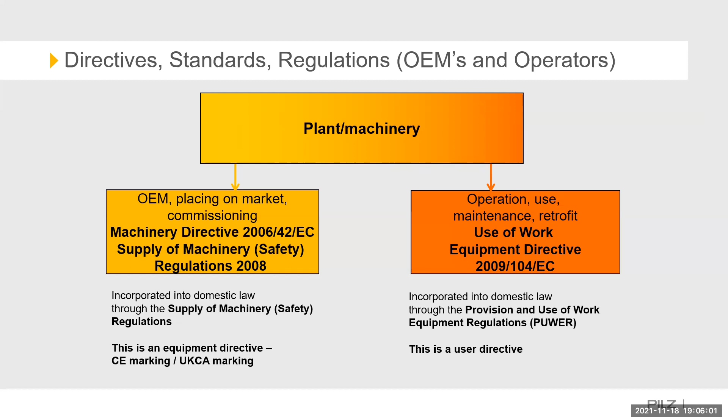So just to give an idea of standards, an overview of standards, it is a legal requirement to follow the supply machinery safety regulations. It isn't a legal requirement to follow a standard. However, if you follow the standard and the process of that standard, it's easier to show conformance to supply machinery safety regulations, as opposed to making up your own policies and procedures, really.

So standards are broken into three. We have A, B, and C standards. A, of which there's only really one, which is ISO 12100, which is risk reduction and design principles.

We have B standards, of which there's two types. There's B1, which are general safety aspects, and that could be 13857 for safety distances, 13849 for safety control systems. And then you have B2 standards, which are specific to protective devices. So in that case, that could be 14119 for interlocks or 13850 for emergency stops.

And then finally, we have C-type standards, which are special safety features for individual machine groups. So for instance, you've got 415 for packaging machines, 201 for injection molding machines. So if you were a manufacturer of packaging machines, you'd have a look at 415 part 1. Have a look at what type of packaging machine you manufacture, and then that would tell you which part of the standard you would need to follow.

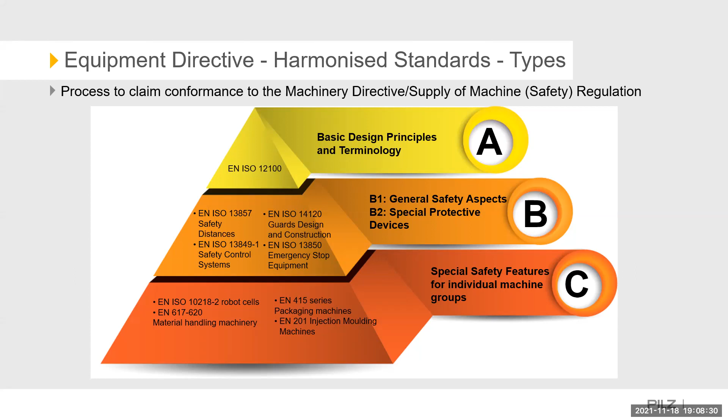The thing to bear in mind is that A and C standards are very rarely updated. Typically, B standards are updated on a more frequent basis due to technology changing, etc. And so what you have to be mindful of is that though there could be a C standard for your particular machine as a manufacturer, it could very well be out of date. And so therefore you'd need to go back and check the relevant A and B standards as well.

So, use of work equipment directive: the employer should take the necessary measures to ensure that work equipment made available to workers is suitable for the work without impairment to their safety or health.

It was adopted into UK law as the Provision and Use of Work Equipment Regulations, or PUWER 98. Pre-Brexit, Brussels would create the directives, and then it would be up to each individual member state to transpose that into their own national law. So for the UK, we took UWED and turned that into PUWER.

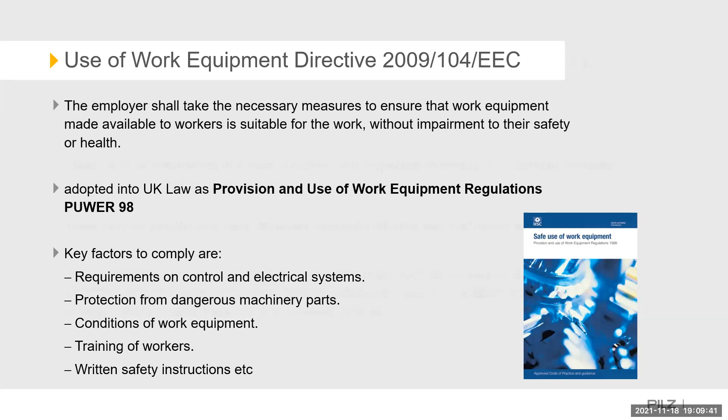PUWER requires that all equipment and machinery is safe.

If you were to have an incident, typically what would happen is HSE would come in to inspect, then they would typically ask for your PUWER documentation, your inspections. If you don't have them, then you would have been basically breaking the law because you haven't carried out a PUWER inspection. But also if you have that inspection, they'd most likely prosecute you under it because PUWER requires that the equipment is safe. The fact that you've had an incident or an accident, they would prosecute you because they'd say that you had a failing against it.

Under PUWER, you should make sure that the equipment is suitable for the intended use. It's safe for use, maintained in a safe condition, and inspected to ensure it's correctly installed and does not subsequently deteriorate. It's used only by people who have received adequate information, instruction and training, and accompanied by suitable health and safety measures, such as protective devices and controls, which could include emergency stops, adequate means of isolation from sources of energy. You've got clearly visible markings and warning devices.

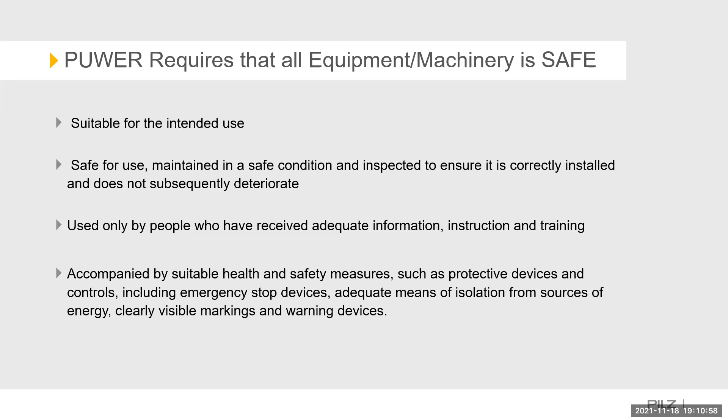PUWER is made up of 37 regulations that are broken down into 6 sections. Section 1 deals with interpretation: what is the work equipment, and what is it used for?

Section 2, which are regulations 4 to 10, covers the management issues with regards to ensuring the suitability of the work equipment for the job it has to do. So you're looking at maintenance, routine maintenance, planned maintenance issues, training of all staff. Have you got a training matrix? And ensuring that staff are aware of the risks to their health and safety when using that piece of work equipment.

Section 3 is a physical examination of the machine, covering regulations 11 to 24. Regulation 11 is dangerous parts of the machine, 12 is protection against specific hazards, 13 is high or very low temperatures, 14 is controls for starting or making a significant change in the operating conditions, 15 is stop controls, and 16 is emergency stop controls.

It's worth bearing in mind that emergency stop controls shall have priority over any control provided for the work equipment under Regulation 15, so the e-stop should take priority.

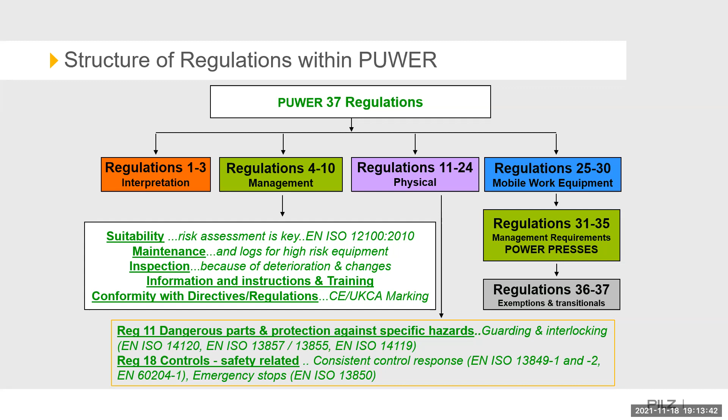But if we look into one or two of the regulations in a bit more detail, Regulation 11, dangerous moving parts: measures must be taken to prevent access to any dangerous part or to stop dangerous movement before any part of a person enters a danger zone.

These measures in hierarchical order consist of the provision of fixed guards, the provision of other guards or protective devices, the provision of jigs, holders, push sticks, or similar protection appliances, and the provision of such information, instructions, training, and supervision as is necessary.

To do this adequately, you would need working knowledge, and this is the competence really, of standards such as 14120 for designing and implementing guarding, 14119 for interlocking, 13857 for distances and sizing of guards, and 13855 for safety distances, stopping times, etc.

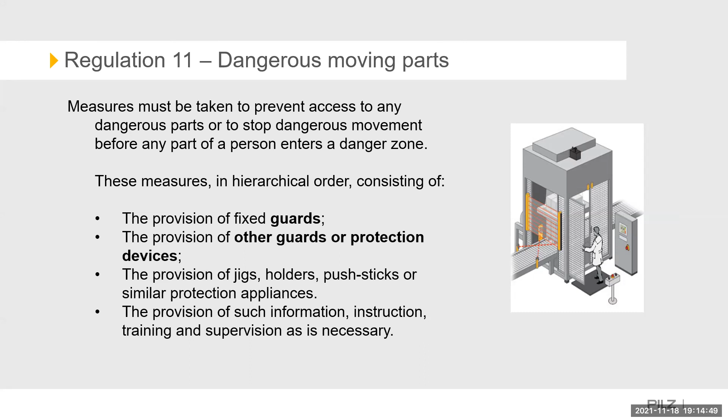And all guards and protection devices shall not give rise to any increased risk to health and safety, must not be easily bypassed or disabled, and must be situated at sufficient distance from the danger zone, taking into account reach over, reach through, and stopping or run-down times.

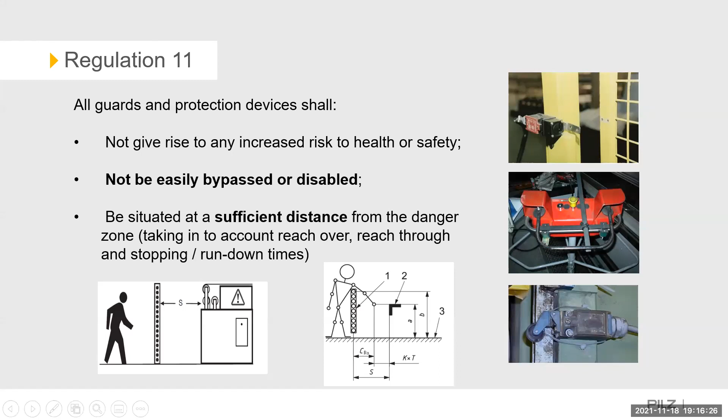So what are the current dilemmas at end user sites? We typically see things ranging from insufficient guarding - there may not be any guarding, too large a gap, it might be damaged, the wrong size, distance, the fixings that are used, or incorrect positions of light curtains and scanners.

So on the previous slide, it may be that the light curtain is too far away from the actual hazard. And so if you were to break the light curtain beam, the hazard doesn't actually stop before your hand or body still gets to that hazard. The stop performance calculations haven't been calculated correctly, or the machine may have been changed over the years and the light curtain hasn't been tested.

Possible fault masking issues in guard safety switch circuits - we'll run through that a bit later on. Open access into dangerous parts of the machinery. You might have uncontrolled access into the moving part of the machine, so there's actually no speed monitoring or monitoring of the machine rotating. You may have no safety when it comes to the pneumatic or hydraulic controls - they're not safety rated. You may have old or non-existent PUWER assessments.

As discussed earlier, it is a legal requirement. Or new machinery arriving on site doesn't meet the current regulations. Or again, that may be that if you've got a sister site, be that in the UK or overseas, that when their machine comes to your site, though they've been using it, it might not meet the regulations.

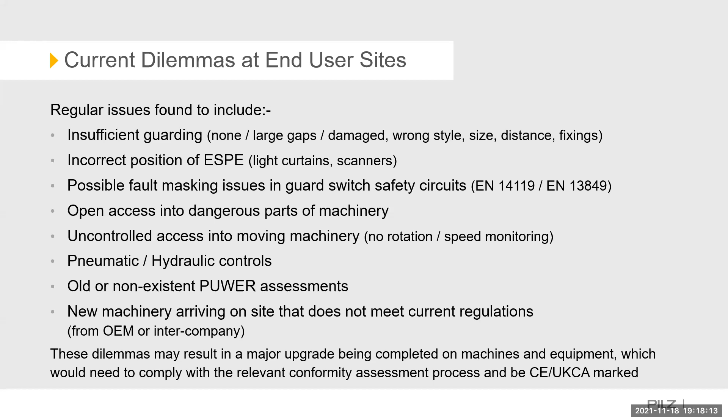So the law - why must we risk assess? And I'm conscious of the audience that I'm presenting to. So the Health and Safety at Work Act under Section 2 requires employers to provide safe equipment to employees, and Section 3, a safe environment for anyone else who could be affected.

And the Management of Health and Safety at Work Regulations 1999 - this is where the legal requirement to carry out a suitable and sufficient risk assessment to justify that the equipment is safe. And even if you purchase a CE or UKCA marked machine, you must conduct your own PUWER assessment and your own risk assessment. The reason for that is the machine manufacturer can't always anticipate where that machine is being installed, how it's being used, and by whom.

An example of that may be that I supply you a machine with a hatch for you to carry out routine maintenance, perhaps to fill oil, for instance. But you've purchased that machine from me and you've mounted it in such a way that I can no longer get to that hatch because there's a piece of steel framework there, for instance. So the manufacturer can't be held accountable for that because it's the way that you've positioned it as an end user, and that would be picked up under PUWER.

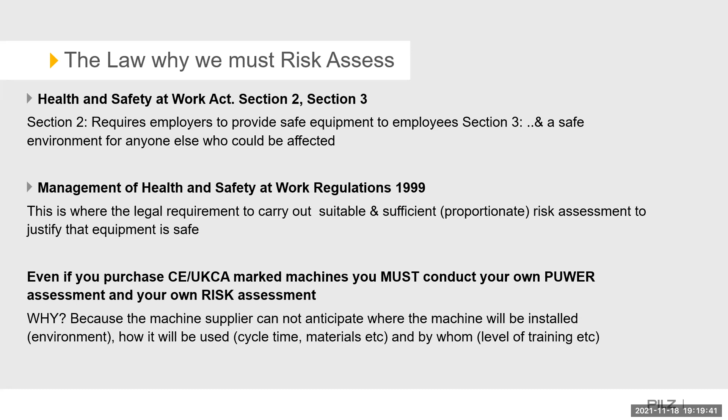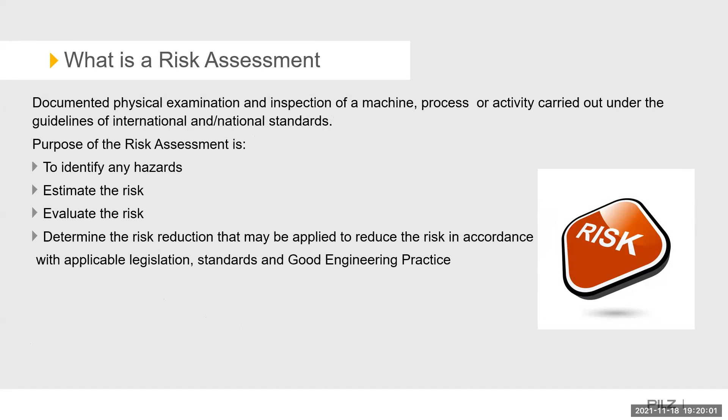So what is a risk assessment? It's a documented physical examination and inspection of a machine, process or activity carried out under the guidelines of international and national standards. The purpose of the risk assessment is to identify any hazards, estimate the risk, evaluate the risk, and then determine the risk reduction that may be applied to reduce the risk in accordance with applicable legislation, standards, and good engineering practice.

So the risk assessment must be dynamic. We must use a continuous process of identifying the hazards, assessing the risks, and taking action to eliminate or reduce that risk, and monitoring and reviewing.

It must be an iterative process. It must be ongoing as long as an unacceptable risk is present, so we keep going around in a loop. And finally, it must be completed on a periodic basis.

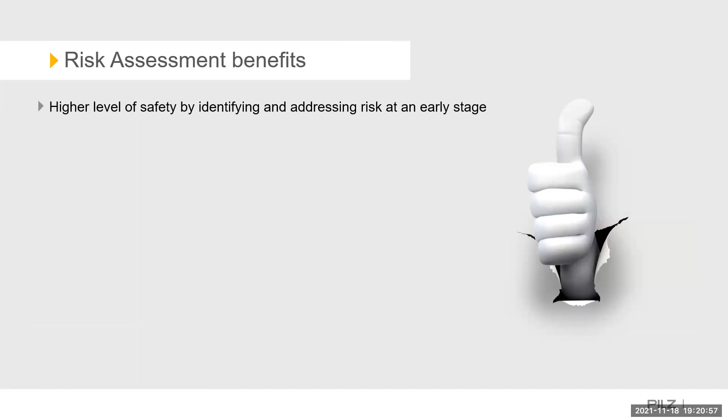So what are the benefits of carrying out a risk assessment? We have a higher level of safety by identifying and addressing risks at an early stage. We have protection of employees from hazards in the workplace. We prevent accidents and injuries from mechanical, electrical, ergonomic causes.

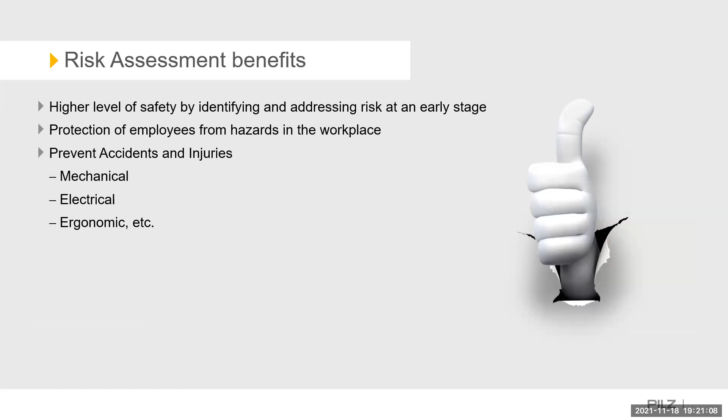Protection of the employer from litigation. Cost savings, less downtime, for instance on a machine, or having to do investigation work, etc. Employee morale. And safety is a subset of quality, so improved safety is improved quality.

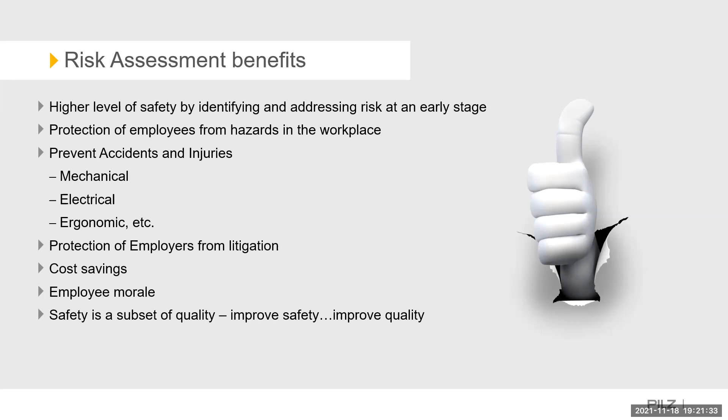So by doing the risk assessment, we have to look at the machine limits. Aspects to be considered when determining the limits of use are the machine's operating modes - it could be a normal operating mode under normal conditions, or another mode where you need to put it into a maintenance mode or a jog cycle, for instance. What are the possibilities of the user to intervene? The machine's area of application, the user's professional qualifications.

Aspects to be considered when determining the space limits - is there room to maneuver? The space requirements for people handling the machine, and the interaction between man and machine. Is there any crush hazards, for instance?

Also, aspects to be considered when determining the time limits - the machine's lifetime, the operation, the maintenance, the disposal. It's okay putting the machine in, operating it, but how are you going to dispose of it when it comes to end of life? Can you do that safely? And the recommendation of maintenance intervals.

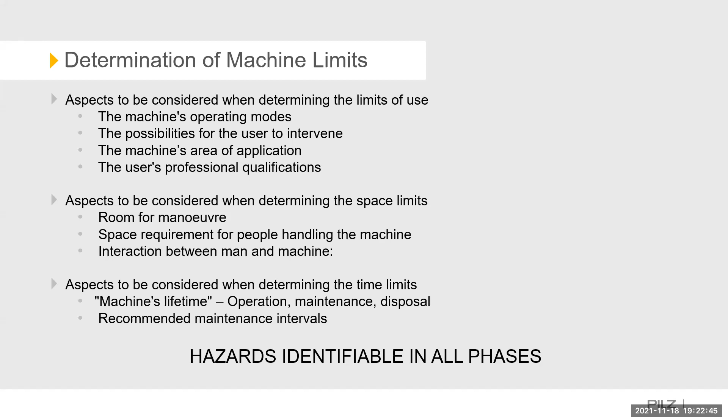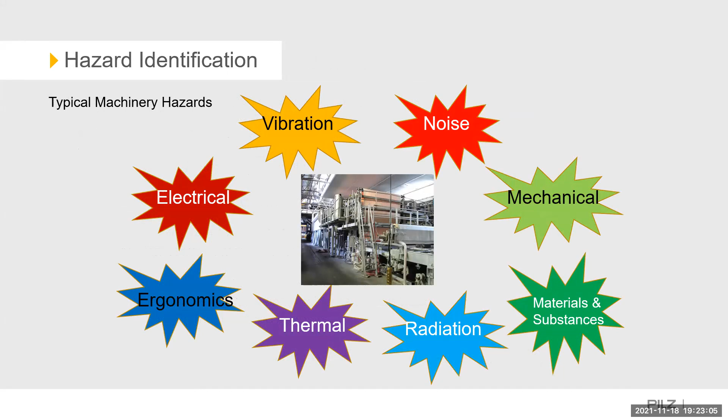If it has, we can finish. If it hasn't, then we use a three-step approach. The first step is inherently safe design measures - protective measures which either eliminate the hazard or reduce the risk associated with the hazard by changing the design or operating characteristics of the machine without the use of guards or protective devices. So the first step is always looking at the design.

So we may be using a load of rollers, for instance, on a conveyor. Could we use a belt instead? Would that reduce the risk?

If we can't reduce the risk by inherently safe design, then we look at safeguarding - protective measures using safeguards to protect persons from the hazards which cannot reasonably be eliminated, or the risk can't reasonably be reduced sufficiently by the inherently safe design.

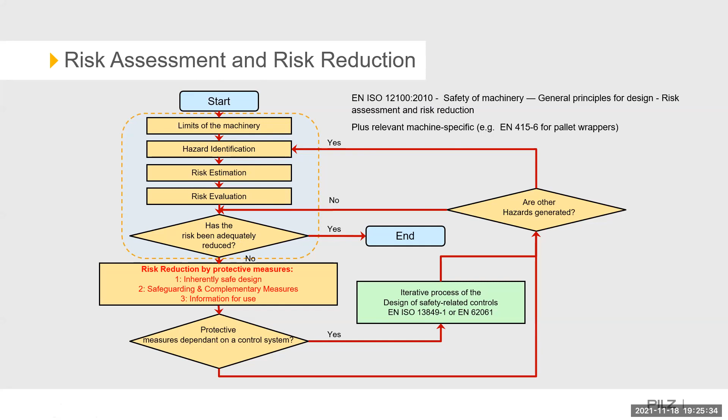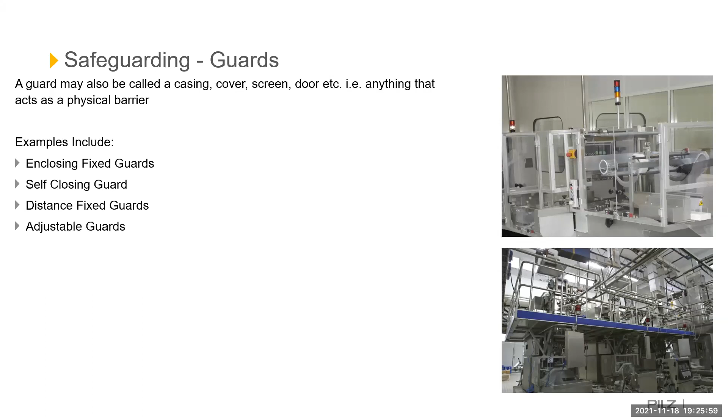So just a quick explanation on safeguards. If we look at guards, a guard may also be called casing, cover, screen, door, etc., but it's anything that acts as a physical barrier. Examples include enclosing fixed guards, self-closing guards, distance fixed guards, adjustable guards, interlocking guards, control guards, and the type of material selected based on application and risk assessment.

So the picture you see on the top right is made of something like perspex. It may be that you actually need to see what's going on within the machine - you need to see the process. It'd be crazy to make it out of mild steel, for instance, because people would want to defeat that interlock to see what's going on within it. So from the risk assessment, we can determine that, and we'd select the appropriate material to suit.

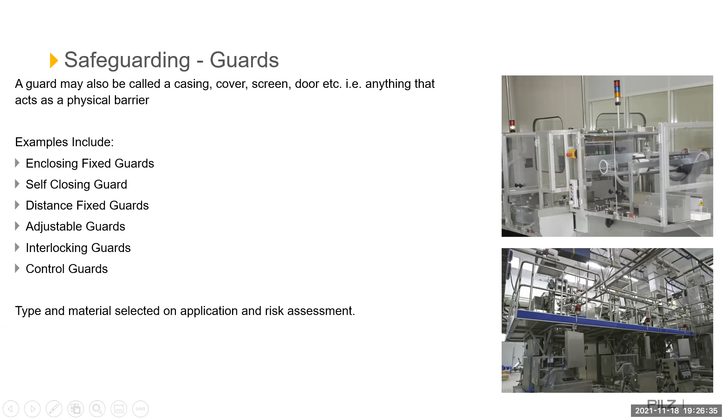The considerations for guards are that they should not cause hazardous crushing or trapping points. Guards should be designed to offer adequate viewing, as discussed earlier. Demountable parts of fixed guards should only be removable with the aid of a tool.

And if regularly removed, captive screws should be used. What we mean by that is you can see here this guard has been removed a couple of times, and over that period the screws have been misplaced, so it's just been put back without any screw retaining it at all. You'll typically find that on a lot of guards. So now, if the guard is regularly removed, it should be captive, so that doesn't happen.

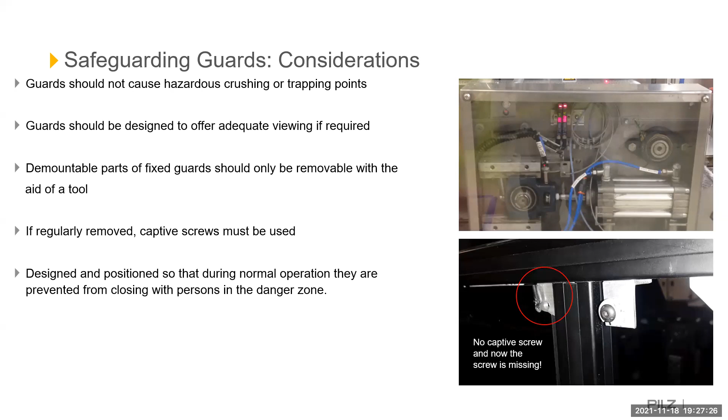They should be designed and positioned so that during normal operation, they're prevented from closing with persons in the danger zone.

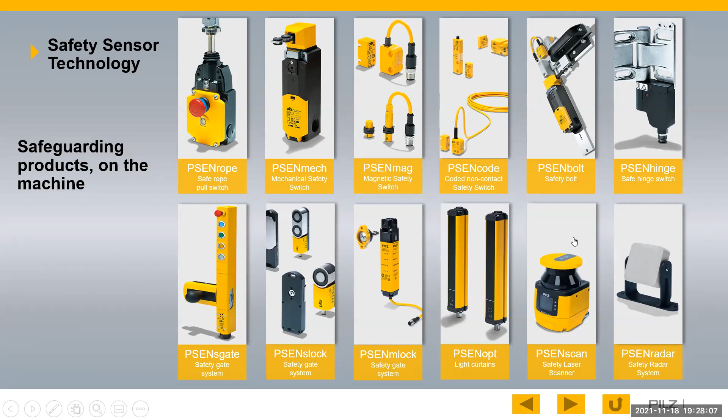And then finally, these are typically on the outside of the machine, but you've also got safeguarding products that would be inside the panel itself. So these are looking at the interlock, and then you've got the safety relays, controllers, and control systems that would evaluate the command of those interlocks, and then send out a signal to stop the machine, or it may be to put it into a rundown mode, for instance.

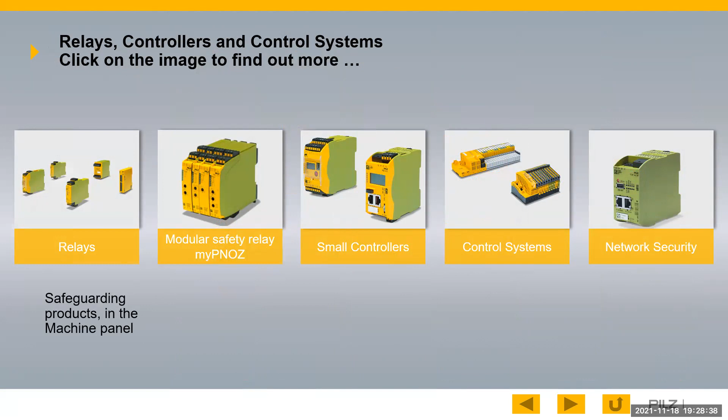And so under normal conditions, the door would be locked. The light curtain is active. So you can't open the door and you can't gain access to the machine because you'd break the light curtain and it would stop the palletizer.

So under normal conditions, the pallet would come along the conveyor. It would break the muting sensors of the light curtain so that it knows it's a pallet and not a person. That's what we call muting the light curtain - it would deactivate it. It would allow the pallet to pass while the light curtain is deactivated, and the pallet will actually be blocking the entrance. So the pallet itself becomes a guard.

And then that would go into the machine, get wrapped, and then go out. If the operator needed to do any kind of maintenance function, then they can come to the control panel.

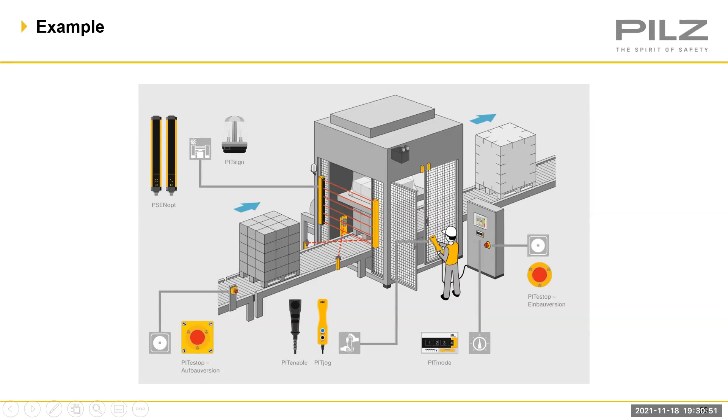They could use RFID technology so that they can put that into the panel itself. They can select a mode of operation. They could tell the machine that they're a trained, authorized and competent maintenance engineer, and that would allow them to put the machine into, say, a maintenance mode, bypass the switch, and by using a jog or two-hand pendant, they could then actually go inside the machine and teach it or look at what the maintenance function needs to be. When they've finished, come out, close the door, and put it back into a run cycle.

I'm conscious of time, so I'll skip on a little bit.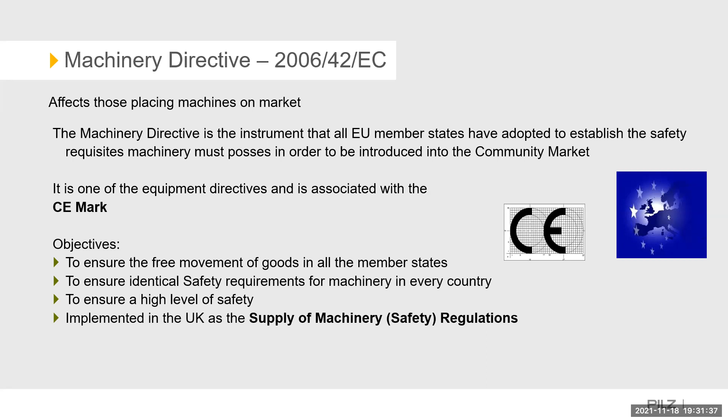So in the UK now, excluding Northern Ireland, we have what is the UKCA mark. That was introduced from the 1st of January this year, and you had until the 1st of January 2022 to conform to UKCA marking and remove the CE mark. That's recently been amended, giving another 12 months extension, so CE marking can continue for another 12 months. In the next few slides, you're going to see a mixture of UKCA and CE marking.

What's worth pointing out is that if you are a UK manufacturer, an OEM, and you are supplying into Europe as of the 16th of July this year, for it to meet the machinery directive, you would have needed somebody who resides within the European Economic Area to actually sign your declaration of conformity. So that is still something that's current.

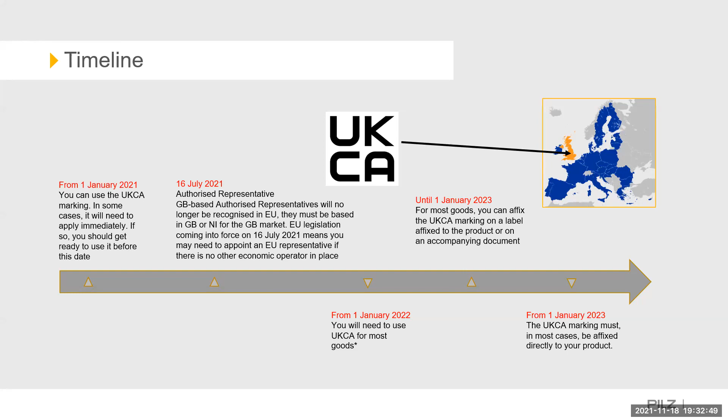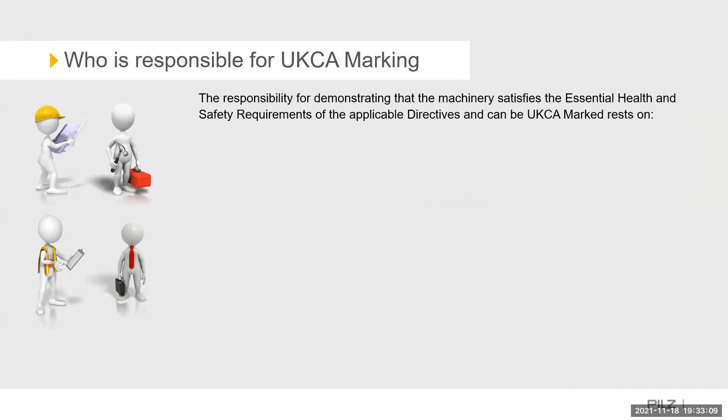So who's responsible for UKCA marking or CE marking? The responsibility for demonstrating that machinery satisfies the essential health and safety requirements of the applicable directives or regulations, now can be UKCA marked, rests on the original equipment manufacturer or system integrator, agents that import machines, companies that directly import machines, persons who build machines for their own use, persons who substantially modify machines beyond their original specification.

So it's worth bearing in mind that if you're an end user and you import a machine from China and it isn't UKCA marked or CE marked, then you actually take on responsibility of the manufacturer because you've imported the machine, and it would be your responsibility to CE mark it or UKCA mark it.

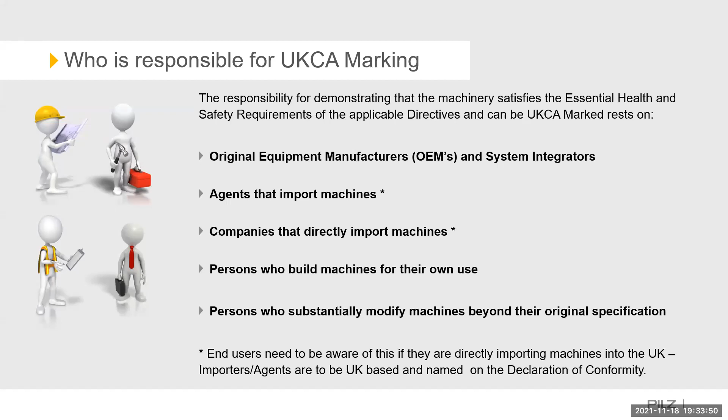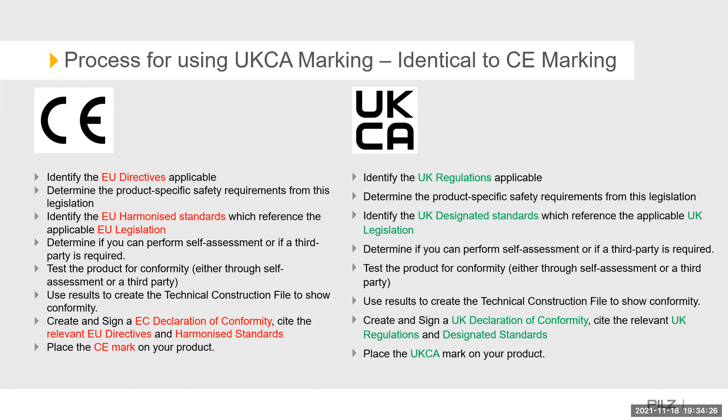So the process for using UKCA marking as opposed to CE marking, as you can see here, is pretty much identical. It's pretty much just the T's and C's that have changed. You identify using UK regulations now as opposed to directives. We don't use harmonised standards, we use designated standards. And you would supply a UK declaration of conformity as opposed to an EC declaration, and you would place the UKCA mark as opposed to a CE mark.

So it's worth pointing out that there is really no change in the process of UKCA marking. All the EHSRs, the essential health and safety requirements from the machinery directive, are still enshrined in the UK supply machinery safety regulations, and these are not changing currently. What has changed is, as mentioned earlier, some of the phrases and the words.

So directives, regulations, notified body is now an authorised body. And that's really why there's been the additional delay of 12 months to implement, because I think the majority of UK authorised bodies were inundated with projects from OEMs, and so to handle the workload, it's been extended.

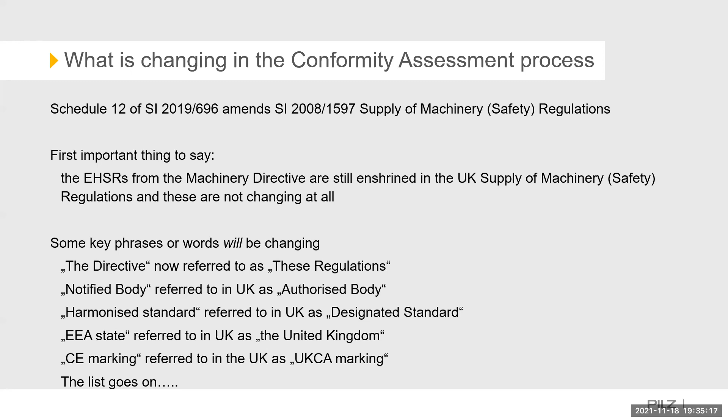It's worth bearing these in mind, because if you're buying a machine from an OEM, when they supply a declaration of conformity, on there will be the regulations that the machine meets. So what you want to make sure is that they're actually current and not out of date. And if they are out of date or not correct, that would raise cause for concern as to what else could potentially be out of date and therefore doesn't meet the actual regulation, so it doesn't conform. Because if they're using an old directive or regulation, that could very well mean that they're using out-of-date standards as well.

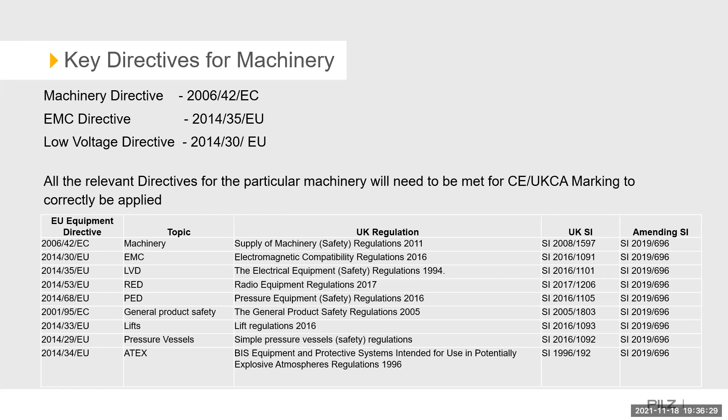So I'll touch on assembly of machines, because this can be confusing to some end users and OEMs. An assembly of machines consists of two or more machines or partly completed machines assembled together for a specific application, and they function as an integral whole and must achieve the same end. So they're all manufacturing the same widget, really.

And the next three bullet points are the important part. The constituent units are assembled together in order to carry out a common function, for example the production of a given product. The constituent units are functionally linked in such a way that the operation of each unit directly affects the operation of other units or the assembly as a whole, so that a risk assessment is necessary for the whole assembly. And the constituent units have a common control system. All three of those must be met in order to meet an assembly of machines.

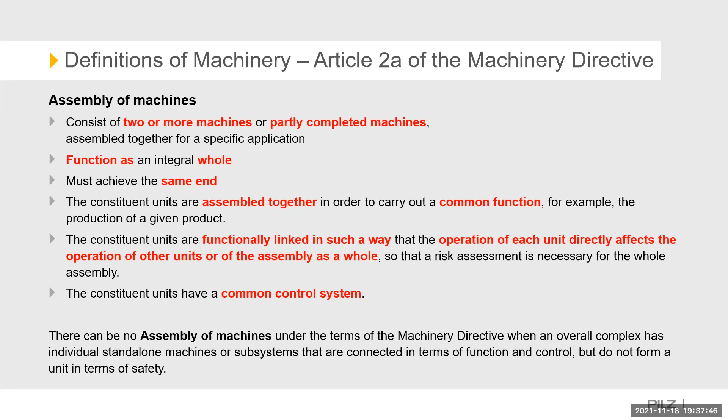So there can be no assembly of machines under the terms of the Machinery Directive or supply of machinery safety regulations when an overall complex has individual standalone machines or subsystems that are connected in terms of function and control, but do not form a unit in terms of safety. Simple, right? So what do we mean by that?

It's worth bearing in mind that when creating an assembly of machines, certainly as an end user, you need to determine who is going to be responsible for that assembly and effectively UKCA mark it at the end. Is it going to be the OEM, an integrator, or is it going to be yourself? That's something you would need to determine at the contractual stage, because if it isn't, and you're just making assumptions, then the OEM or the integrator could at the end of the installation say, no, I've not quoted to UKCA mark it, and then that would fall on your responsibility.

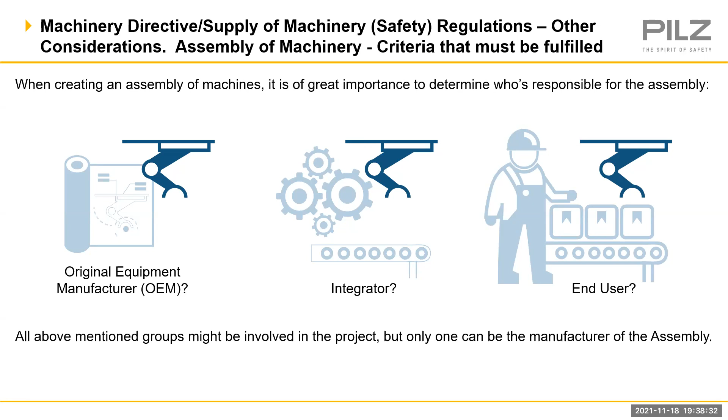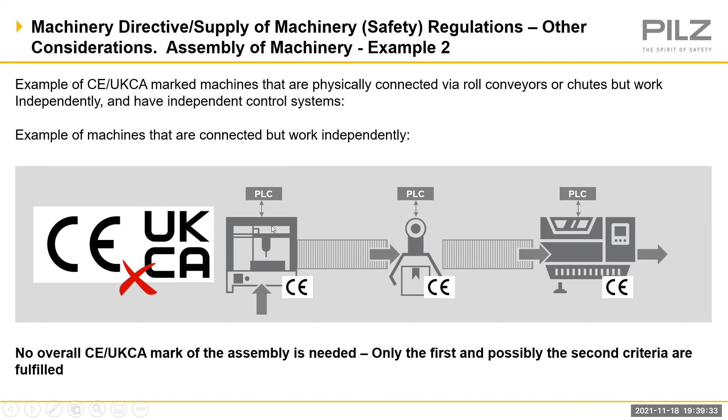An example of CE marked machines that are physically connected via roller conveyors or chutes, but work independently and have an independent control system. Again, there's no overall CE mark that's required because the machines are all independent, but you've got kind of a gravity-fed conveyor that's going to feed the parts down. So if this stops, it has no bearing on the other two machines.

The machines that are connected via power-driven conveyors but still work independently - the conveyors have their own control systems based on sensors at the in and the out feed. So we've got our three machines again, they've got powered conveyors between each. And if this machine stops, then this machine's going to stop because it can sense that this machine's no longer working, for instance - it doesn't want to have a backup on the conveyor. So would that constitute an assembly of machines?

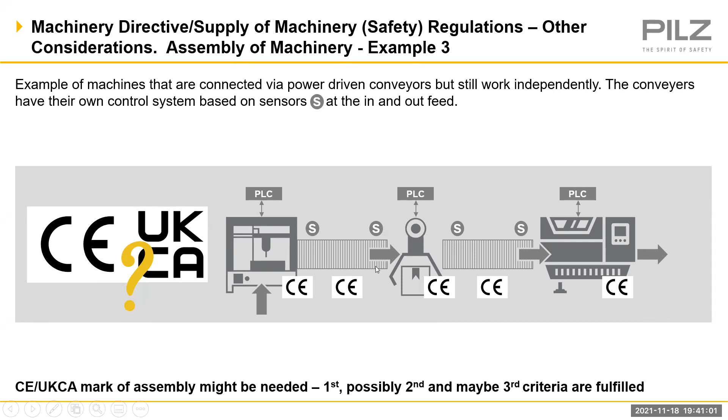Well, in most cases, the conveyors will have some kind of signal exchange for starting and stopping, as you can see here. If that is the case, the third bullet point will be fulfilled, and CE marking is applicable if also bullet points 1 and 2 were met. But in this actual case, it explicitly mentions that there's no signal exchange, and the conveyors and other machines are working as standalone units based on in and out feed sensors. So in that case, the third bullet point, which is an overall control system, is not the case. And therefore, this assembly of machines in this instance wouldn't need to be CE marked. There's an example here.

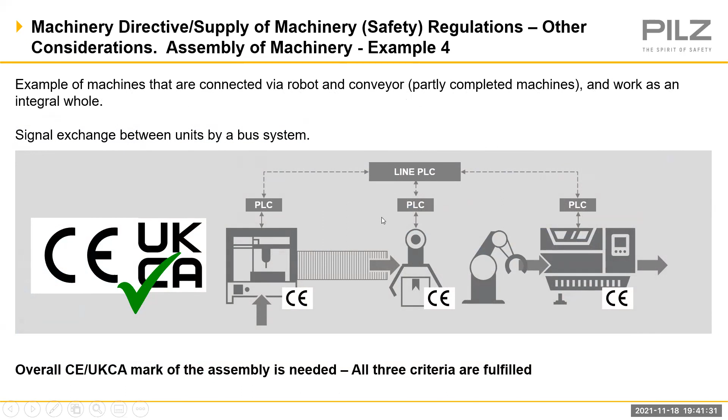If we have an example of machines that are connected via robot and conveyor or partly completed machines and work as an integral whole, then this would need to be CE marked because we've got our three machines, we've got a robot, so it's a partly completed machine, and then we've got an overall line PLC looking at what each one is doing. And so that meets all three of the criteria.

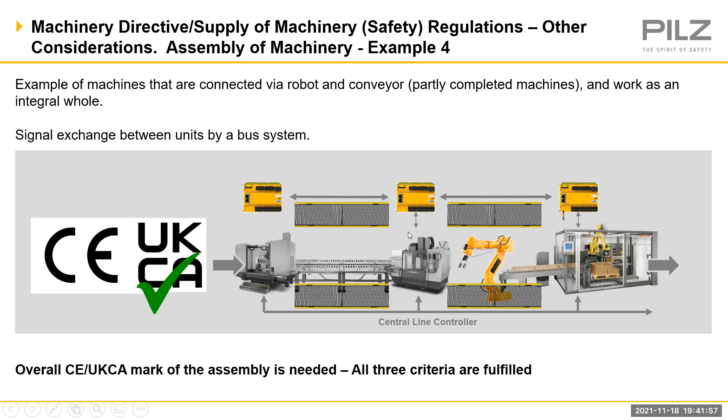Likewise, the example here again is conveyors and robots or partly completed machines, but the signal exchange between each of the safety controllers is done via what's called a bus system. So again, all three criteria are met, and you'd have to CE mark or UKCA mark the assembly as a whole.

The Machinery Directive and Supply Machinery Safety Regulation only covers new equipment, so we're in a kind of grey area when it comes to adding or replacing equipment. There really is no clear criteria for this topic, but there is some guidance.

If you're adding or replacing an existing unit with a CE marked machine that does not significantly affect the operation of the assembly, then no action is required. So if you're replacing one robot with an exact replica, there's no need to re-CE mark.

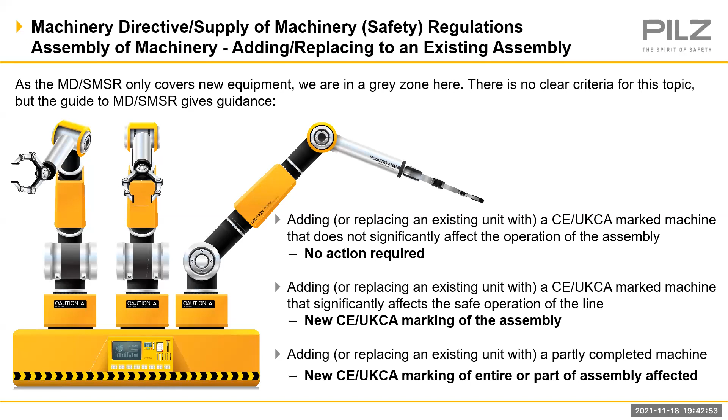If you're adding or replacing an existing unit with a CE marked machine that significantly affects the safe operation of the line, then you would have to re-CE mark the machine, the assembly as a whole. And finally, if adding a partly completed machine, then you would have to CE mark or UKCA mark the machine as a whole.

A diagram of that really would be: addition of a partly completed machine, then you'd have to do a new CE marking process. If the addition was a complete machine with no new hazards and no increase of risk, then there's no new process. But if there were new hazards and the existing safeguards were not sufficient, then you'd have to again go through the CE marking process.

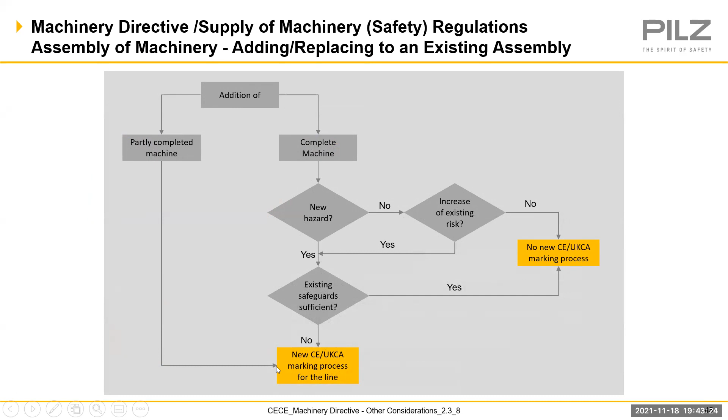Now I'll touch briefly on 13849, which is functional safety of the control system. There are really two parts for functional safety: the process world and the machine world. Process would be like oil refineries, and typically you have EN 61508, which is functional safety of electronic, programmable electronic safety related systems, normally covered under SIL.

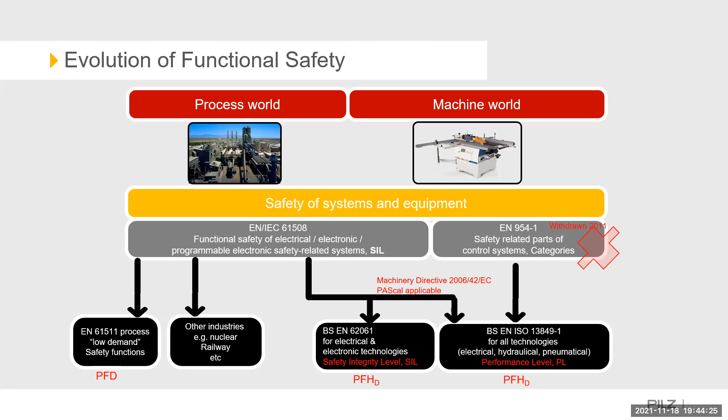There's a standard that comes from that umbrella standard, which is 62061, used for electrical and electronic technologies. Then there used to be 954, safety related parts of control systems, which has now been superseded by 13849. The difference is that 13849 is used for all technologies, not just electrical, but can also be used for hydraulic and pneumatic. So a lot of machine manufacturers will use that because it covers those disciplines as well.

13849 looks at performance levels, which range from A to E in a hierarchy. Performance level E provides greater risk reduction than performance level D, and as mentioned, it applies to all sources of energy. It comes in two parts.

Part one is the design, and 13849 part 2 is really the validation - so how you would carry out function tests and fault simulation, testing of the safety related software and hardware functions, and the check of sensors and actuators after installation and wiring configuration.

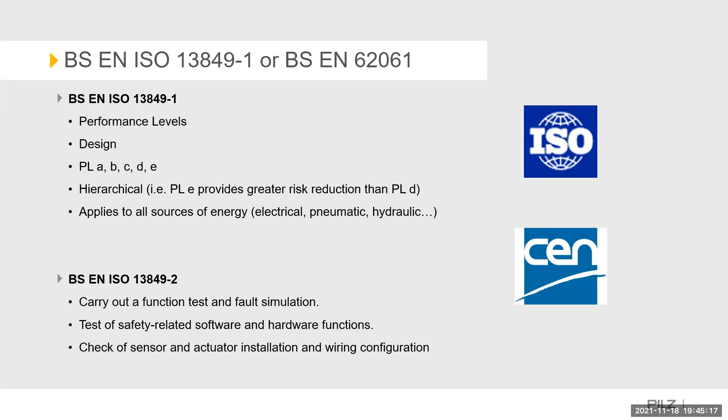There's a systematic approach to the design of the safety related control systems. I'm not going to run through everything, looking at the time.

So we have our risk assessment using 12100. That would then take us on to our inherently safe design and safety specifications. We'd then look to design the safety related parts of the control system, and for that we'd use 13849 part 1. Once we've designed our system and installed and commissioned it, we would then use EN 13849 part 2 to do the validation and check the overall safety requirements.

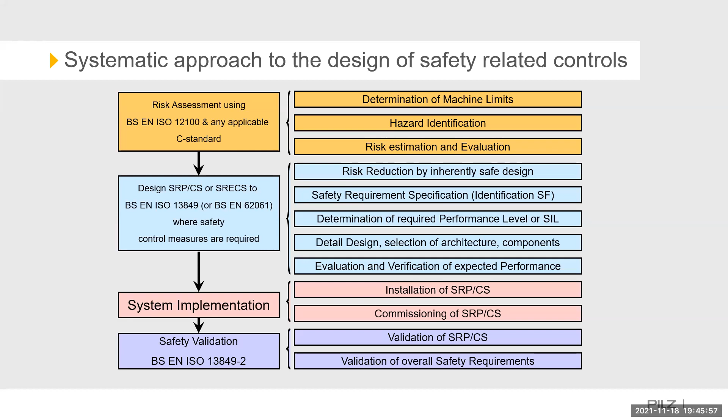The process that we use for the safety related parts of the control system, you can see here. So we identify the safety functions to be performed by the safety related parts of the control system - that might be stopping the machine, for instance. But we need to determine the required performance level.

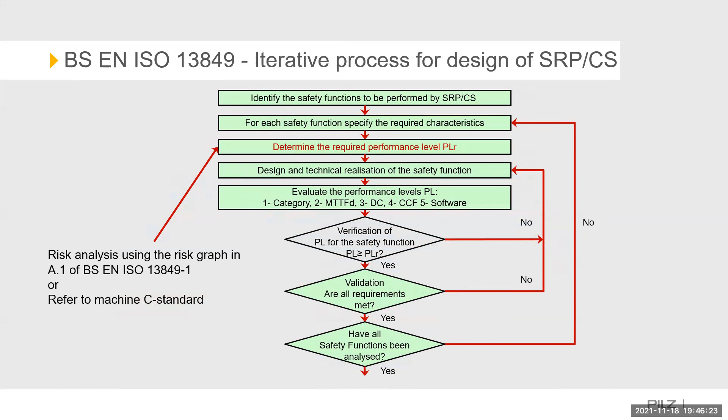And we do that by using a risk graph, similar to a risk assessment really. We would start by looking at the severity of the injury - S1 being slight, so normally a reversible injury, a scratch or bruise for instance. Or S2, which is serious - an irreversible injury, or death, which is typically irreversible.

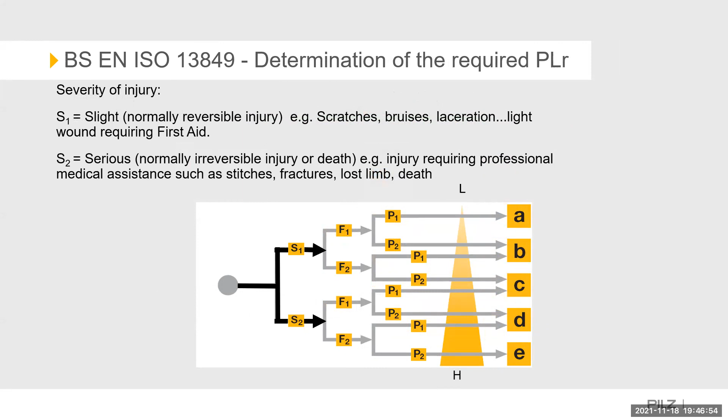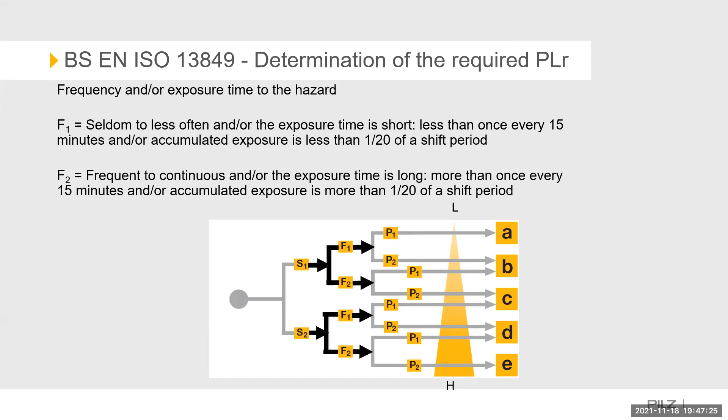Once we've worked out the severity of the injury, we would then move on to the frequency or exposure time. F1 being seldom - the exposure time is less than once every 15 minutes, or accumulated exposure is less than 1/20th of a shift period. F2 is frequent to continuous - the exposure time is more than once every 15 minutes, or the accumulated exposure is more than 1/20th of a shift period.

Once we've carried that out, we then look at the possibility of avoidance - P1 being possible in certain specific conditions, and P2 being scarcely possible. From that, we would then have our required performance level, which we'd use to choose the safety component required. But then we also have to look at the category that it falls under.

And these range from Category B to 1, 2, 3, 4. Category B means that a safety function can be lost in the presence of a single fault, and it's realized by what we call a single channel. So it's just an input and output.

Category 1 is as B, but less likely because we're going to use well-tried components. Category 2 is as per 1, but again, it's less likely because we're going to carry out periodic testing, but we still use well-tried principles. And again, it's still single channel.

Category 3 is a single fault, ideally detected, won't cause loss of the safety function. The second fault can cause loss of the safety function. There is a redundant structure, so it's now dual channel, and well-tried principles. Category 4, the highest, neither a single nor accumulated faults can cause loss of the safety function. Single faults must be detected, with redundant structure and cross-checking, as well as well-tried principles.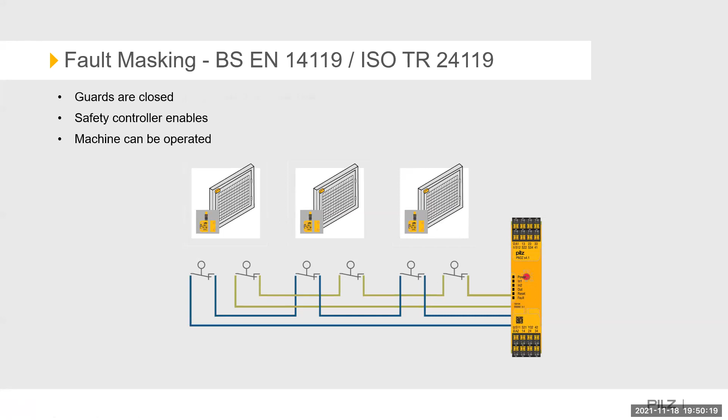The operator opens guard 1. You can see that this contact is open, but channel 2 is defective - it's remained closed. It may be in a washdown zone or something like that, so over time there's been water ingress, and that contact has just welded closed. The safety controller does its job - it switches off because it sees an open contact, and the machine is in a safe state at the moment.

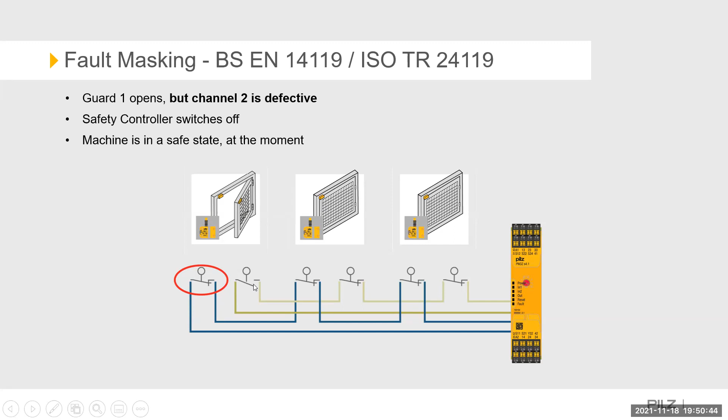However, when they've closed guard 1, the machine hasn't started because it only saw 1 contact open. It may be that the operator's been there a few years, and they know that if they open guard 1, they have to then open guard 3, and that makes the machine start. But it only makes the machine start because it opens both contacts, and that tricks the safety relay into thinking it's got a healthy system.

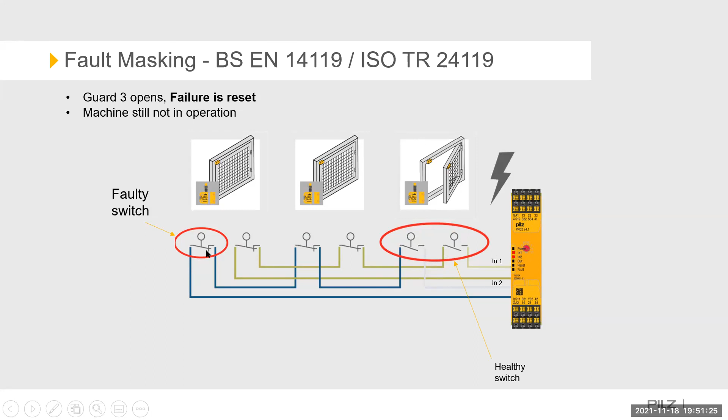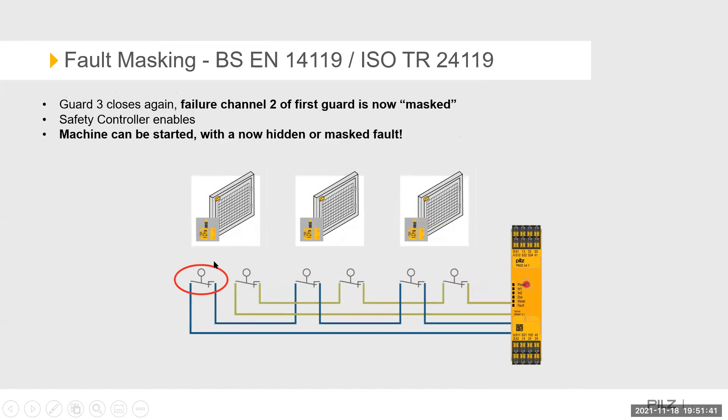So they open that guard, which clears the fault within the safety relay that was created through the one switch not opening. They then close the door, and when guard 3 closes again, the failure in channel 2, the first guard, is now masked. That's not seen - the safety control is enabled, and the machine can now start. But over time, in this washdown environment, channel 1 has now failed, meaning the machine can be started with a dysfunctional guard.

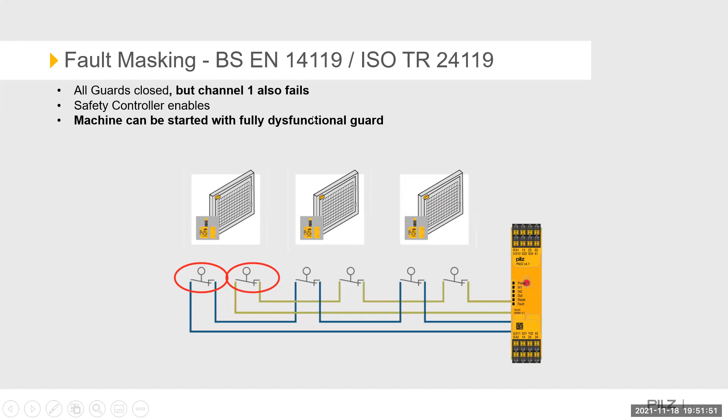So the machine's now running. If guard 1 is now opened, because the switch has effectively failed, both contacts are closed, the guard is open, but the machine will still run. And so this is what is meant by fault masking.

A frequently open guard is one that's opened more than once within an hour timescale. Within the technical standard 24119, it states that if it is a frequently open guard and you have more than 1, then you can only ever have 1 interlock wired back to the controller. So you're monitoring each gate independently.

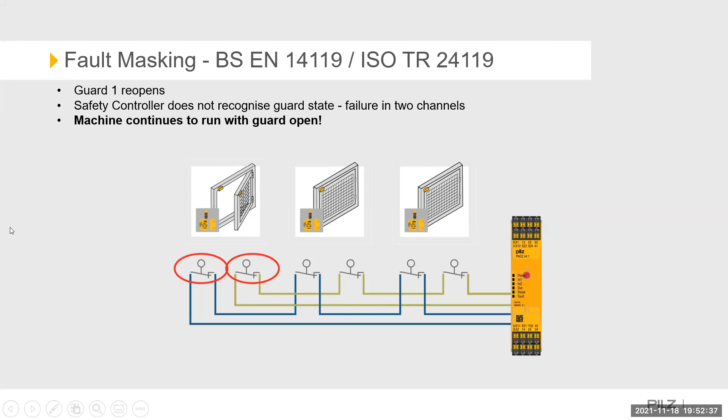So that's pretty much ran through the presentation with regards to machinery safety, and that's quite a lot to take in. I'll just give a very quick overview with regards to Pilz.

Pilz is a business with headquarters in Germany. We were founded in 1948. We were originally a glass blowing workshop, but our founder created the world's first safety relay for e-stops, and we now have 44 subsidiaries throughout the world, over 2,500 employees. We're still a family-run business.

The children now run the business, Thomas and Susanne. We have a mixture of products, so there's 3 divisions to Pilz. We have our sensors, our interlocks, we have our controllers for the safety relays, the HMIs, e-stops, and we also do software.

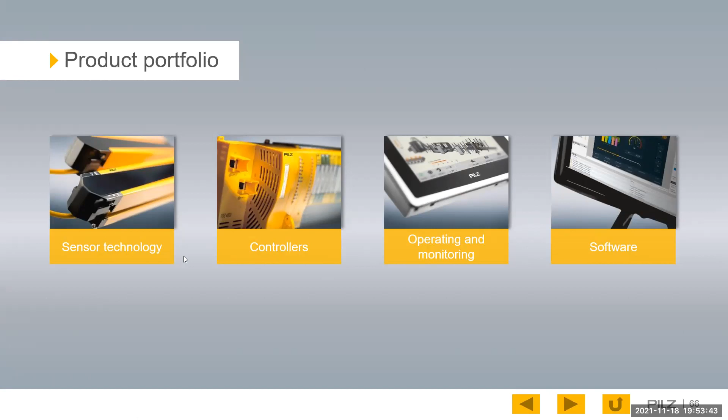But we also offer consulting, engineering and training. So we can carry out PUWER assessments, risk assessments, safety design, all on your behalf. If you are an end user and you need a UKCA mark, or you're having a machine built for you, we can act on your behalf to make sure that it is being built in accordance with UKCA or CE. And then we can also carry out workplace safety, such as plant assessments, lockout, tagout systems, PUWER assessments, etc.

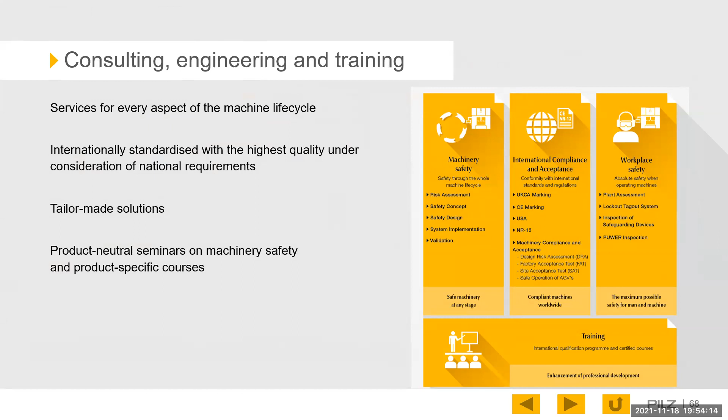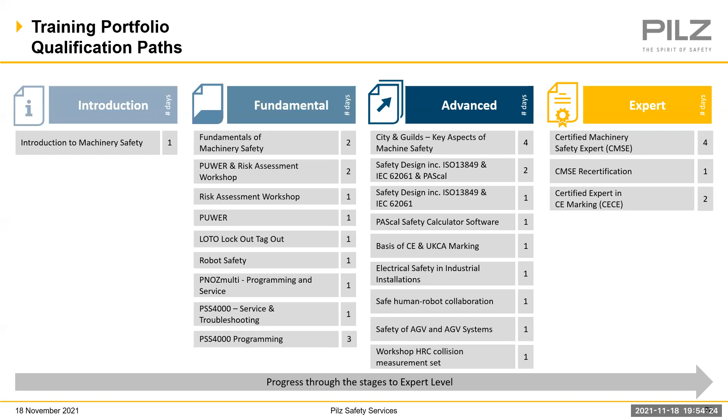And then finally, we actually offer training. We start from introduction, so the basics of machinery safety, fundamental, all the way to expert. So it's possible to design your own path, really. You may want to spend a day or 2 days doing PUWER risk assessment, find out a bit more about safety design with 13849, for instance. And then, depending on your qualifications and everything else, you can do full-blown CMSE, TUV certified courses.

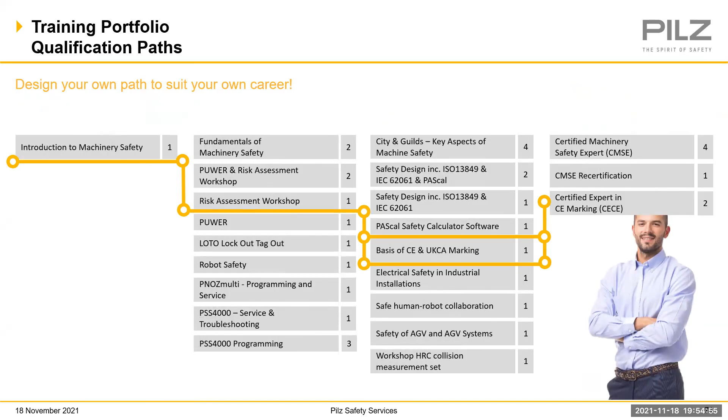That just leaves me to say thank you all for your time this evening. I hope you found it informative and worthwhile, and I'll hand over to Richard and others to let me know if there's any questions.

Sorry, John, do you want to take Jason through the questions? We seem to have lost Richard.

Yeah, certainly will. First of all, Jason, thank you very much for an excellent presentation. That was really, really interesting, very detailed as well. There have been some questions in the chat that I'd just like to ask you, please. We did have one individual wanting to know what OEM actually meant, but somebody kindly answered that for us with the original equipment manufacturer.

There was a question that asked if a business still has old machinery installed and commissioned in the 1950s, how is that machinery affected by current and changing directives and legislation? Okay, so it's a common question that we get asked. You know, an end user may have a machine that they purchased in the 50s, 60s, 70s, 80s, and it was fit for purpose and met all the regulations back then. So it's okay now. And the short answer to that is no. You have a legal responsibility to make sure that the machine is up to date with current technologies.